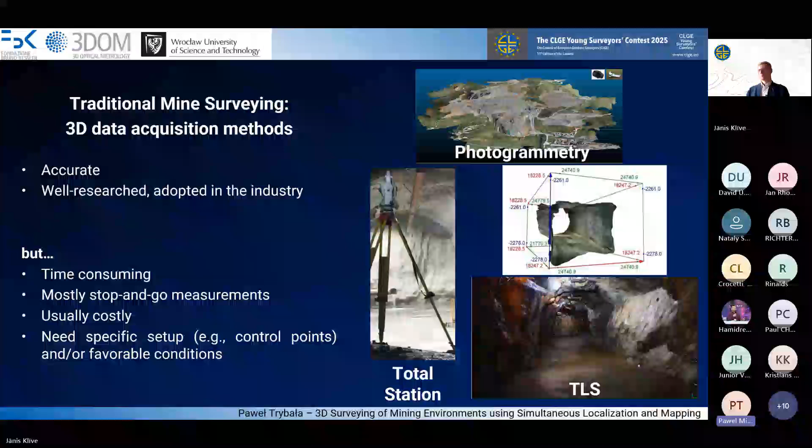I'm Paweł Trybała from 3D Optical Metrology Unit in Italy, but this is a PhD work that I carried out in Poland about application of mobile mapping systems, specifically in mining environment. So in traditional mining surveying, we have already some established methods of acquiring 3D data, like terrestrial scanning and photogrammetry. But of course, they're accurate, but also time-consuming, and the equipment is costly. So we are dreaming, let's say, of some more convenient methods and also to reduce the cost of operation.

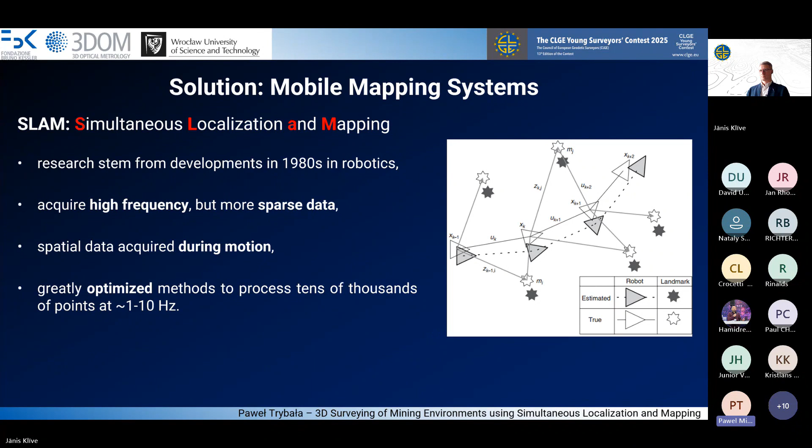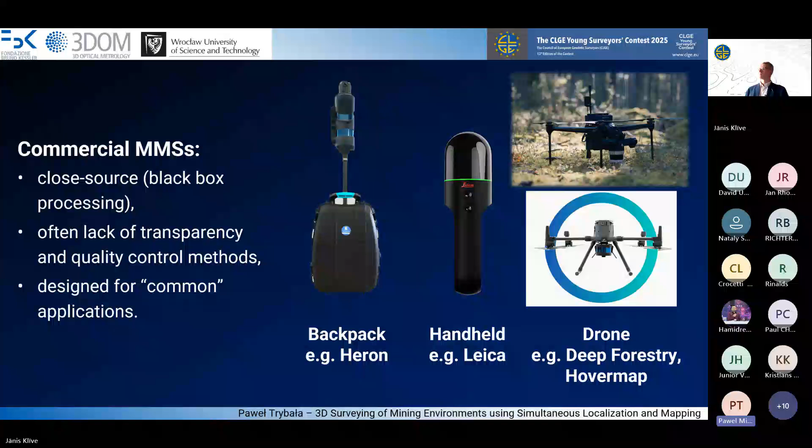And the potential solution for that comes in mobile mapping systems, which utilize SLAM methods, or simultaneous localization and mapping. The core principle of these methods is that they acquire data during motion, but at a high frequency, so you can try to estimate the trajectory of the sensor moving through space. And of course, this research has been done for quite a few years, so there exist in the market some commercial solutions, but the biggest drawback for us, for surveyors, is that they are closed source, so we don't really understand how exactly the processing is performed, so we cannot really say what the accuracy at different parts of the trajectory is to really satisfy the customer demands.

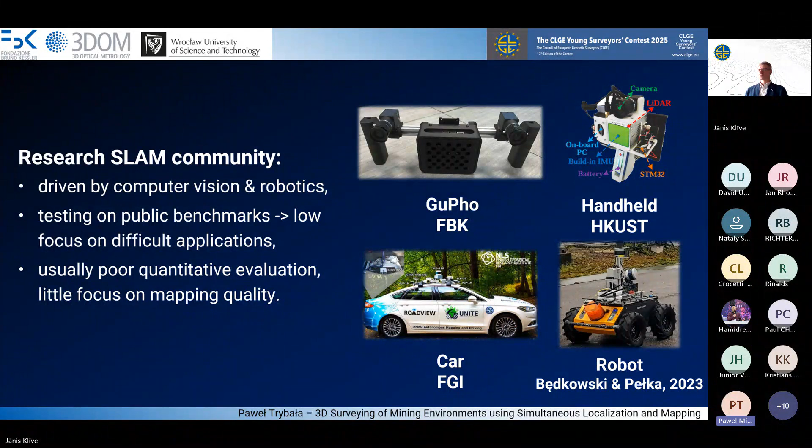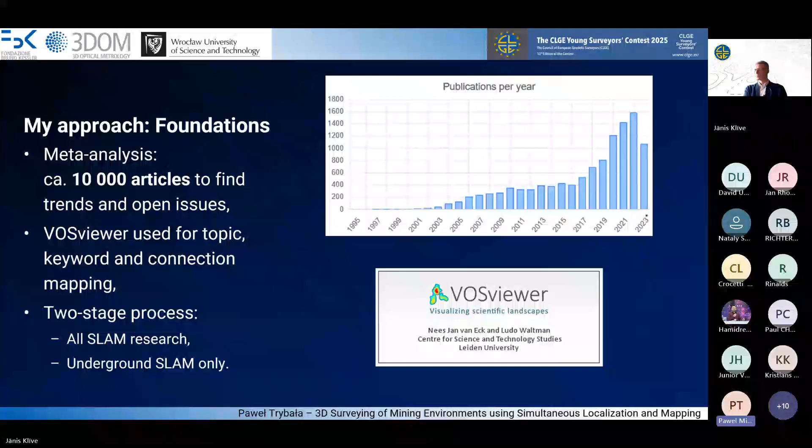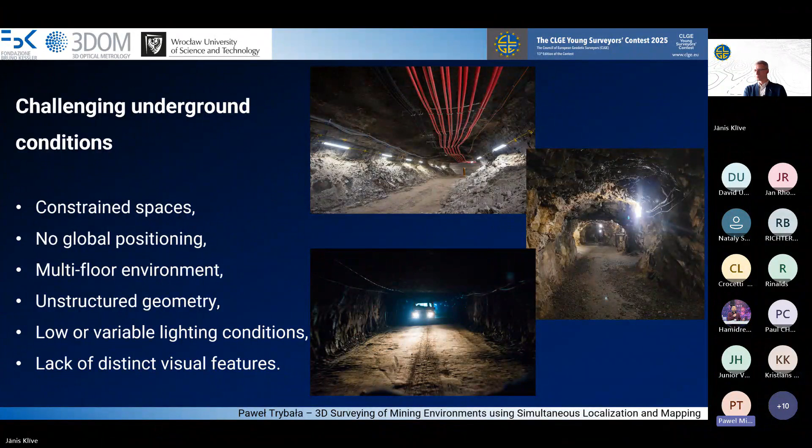So the conclusion from that is that underground conditions differ significantly, and you can see in a while some examples of images of the tunnels that I've been scanning. And of course, this is not a typical urban or indoor scenario. We have very unstructured environments. There is absolutely no global positioning. Sometimes they appear multi-floor, very unstructured environments, which pose a lot of challenges to normal mobile mapping systems.

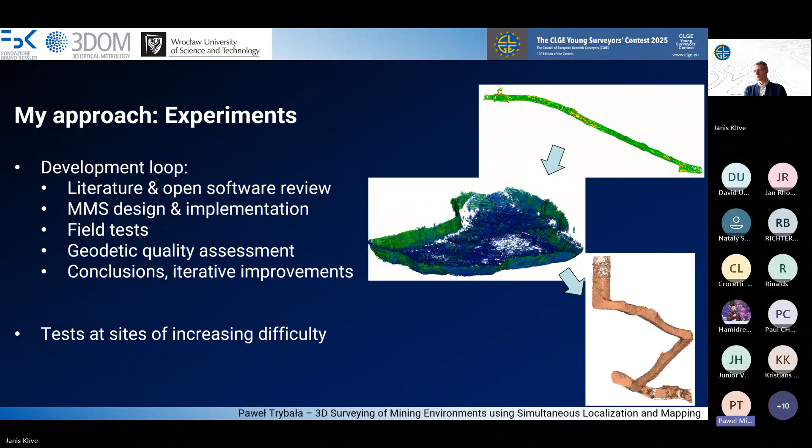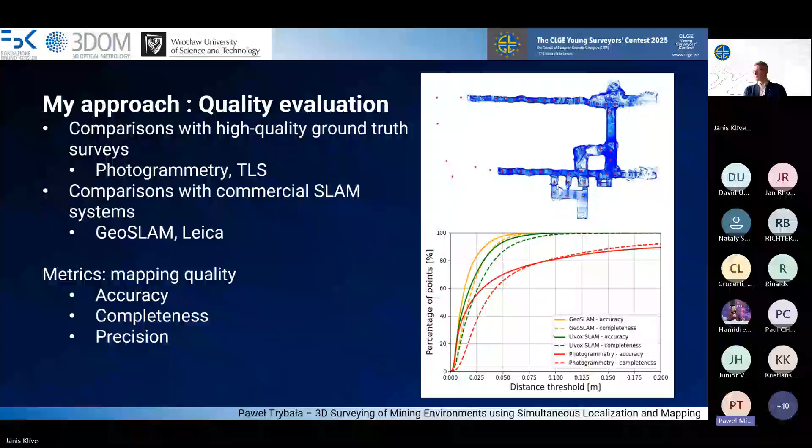And in my thesis, I took an iterative approach. So first, I selected the best solution that I could find in the literature, applied it, tested it in field, and performed an exhaustive geodetic quality assessment of the results to find areas where I could improve, and then did it again all over. So this aspect of quality evaluation was very important here. I used surveying methods such as photogrammetry and terrestrial scanning to get the ground truth and to evaluate my methods in terms of the quality of point clouds, so accuracy, completeness, and precision of the results.

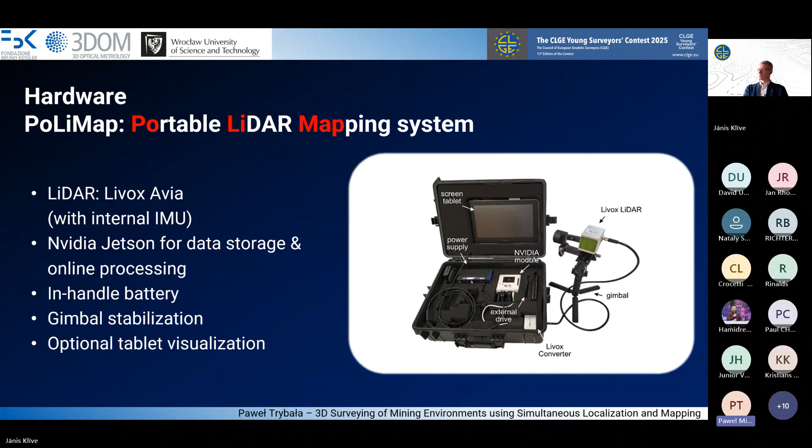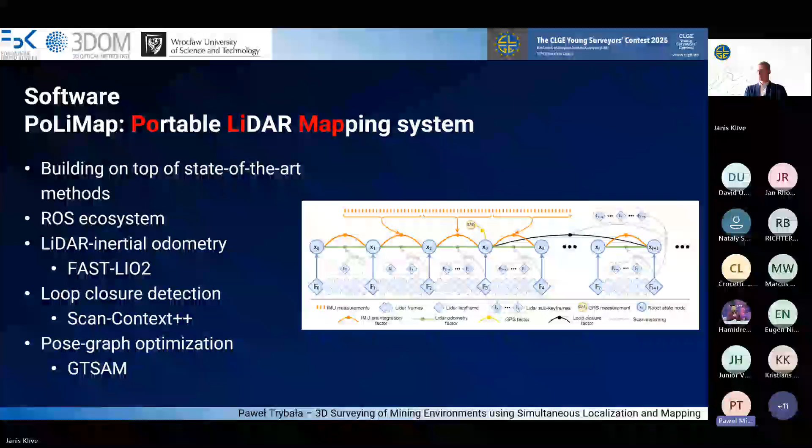And this is the final iteration of the system, which is called PoLiMap. The cost of building the system is probably a bit over 2,000 euros. It consists of a LiDAR unit with internal IMU, a processing unit for real-time processing, and other necessary accessories. In terms of the software, I collected first some state-of-the-art components, so LiDAR inertial odometry, a loop closure detection module, and pose-graph optimization of the trajectories, and incorporated some of my own improvements along the way, with the most important ones being inclusion of ground control points, ability to close the loop with a really high precision under centimeter level, and some extensive parameterization and in general robustification of the adjustment part of the SLAM.

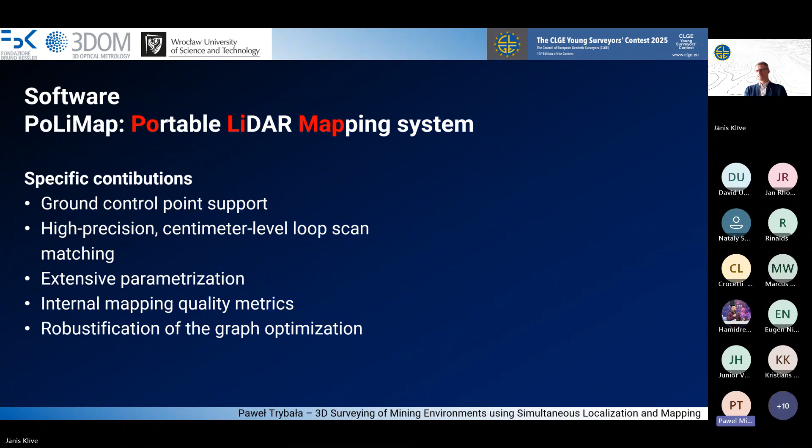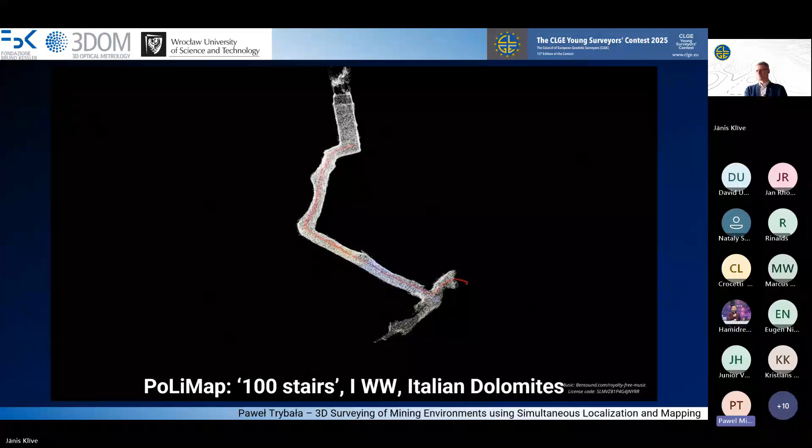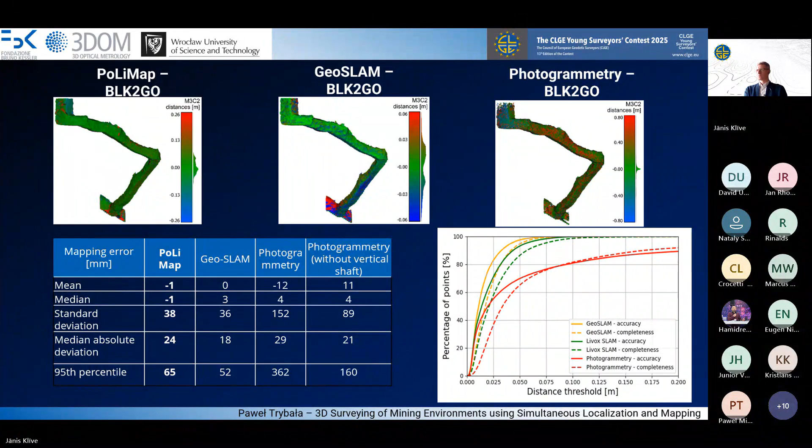So you will see the last case scenario tested here. This is an underground tunnel carved in rock, actually a staircase of over 100 meters here in Italy, and PoLiMap reconstructed it. At this site, I collected also some ground truth with other SLAM systems, namely made by Leica and GeoSLAM. And you can see from the results that the standard deviation of the differences between these point clouds was below 4 centimeters, and especially compared to GeoSLAM and photogrammetry, we greatly improved on the drift at the end of the sequence. So we are reaching really comparable results for many applications.

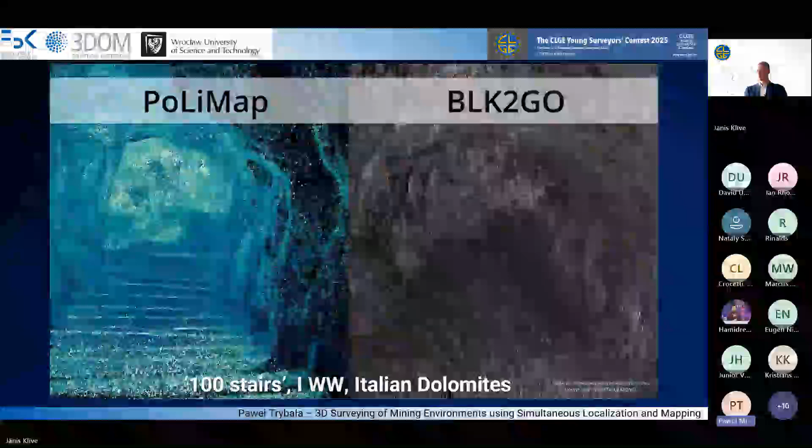And this is the fly-through of the point cloud reconstructed with PoLiMap and with the Leica solution. Of course, in my system, there is no camera, so there is no texturization of the point cloud at this point. But you can see that the general precision is very comparable and could be useful for many applications in the mining sector. And I'm happy to say that this work still lives. It's being actively used in the European project VOT3D to scan kilometer level sequences in the underground tunnels of copper mines in Poland.

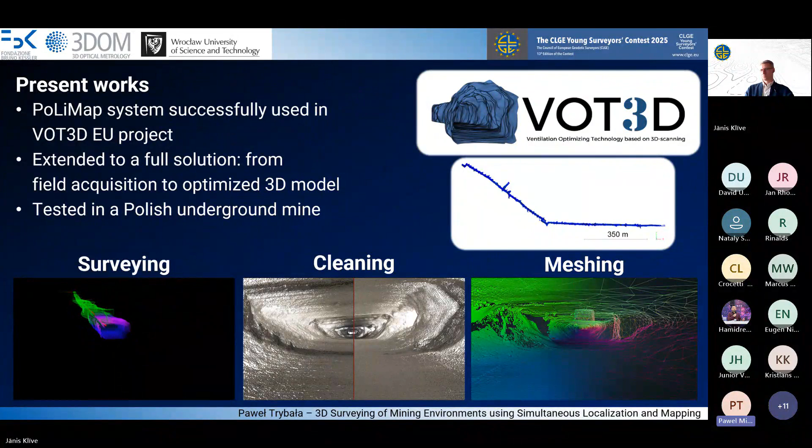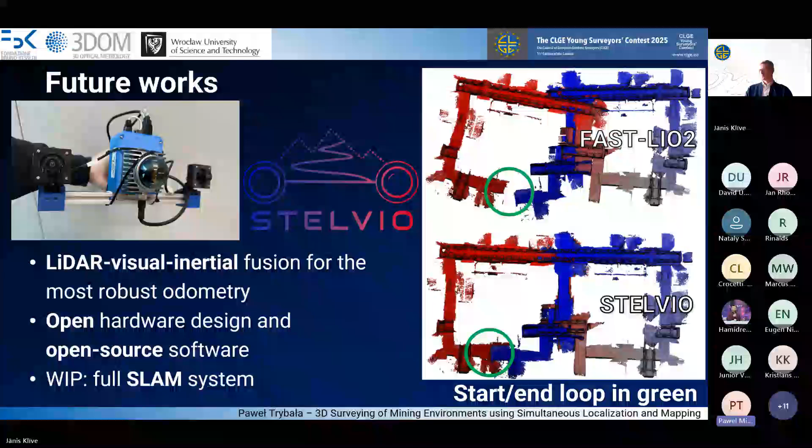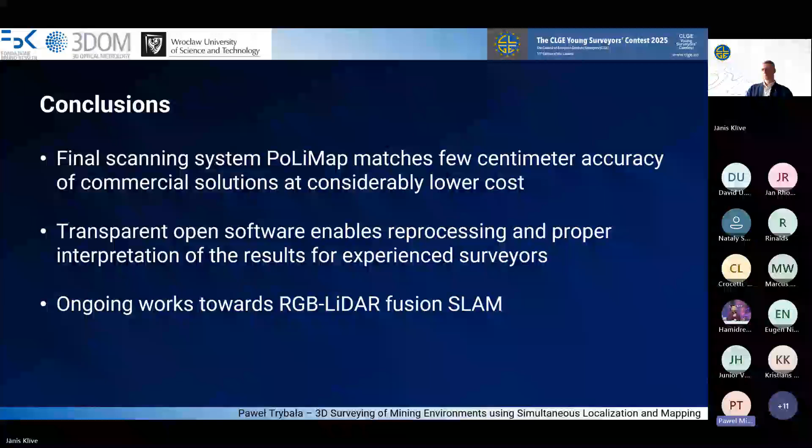And here in Italy, I'm also working on some improvements to the system. I believe that we can get to the most robust SLAM system through inclusion of other sensors. So I'm trying to add a multi-camera system for the next iteration of my SLAM system. And to wrap it up very shortly, the system that I developed tries at a very low cost to match accuracy of commercial systems, but also to give surveyors more insight into the processing, how it works, what are the accuracies that they can reach at different parts of the trajectory, so that they can really certify the quality of the results they deliver.